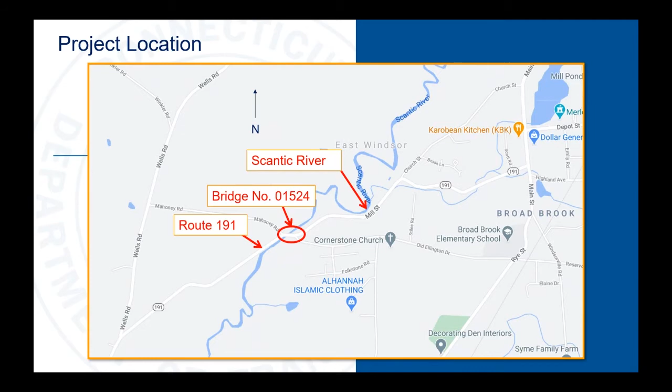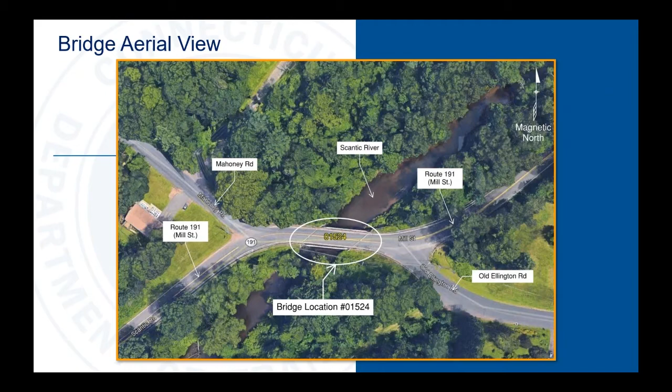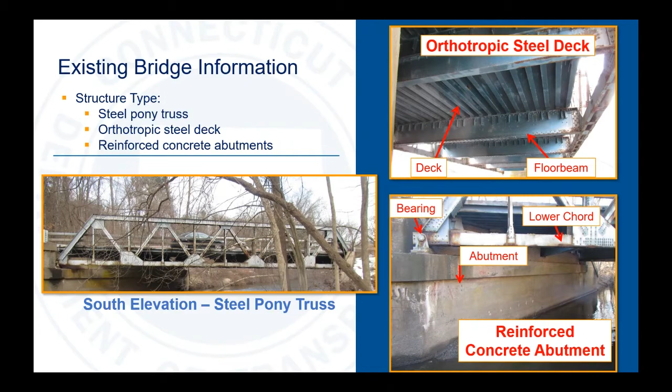The existing structure consists of a steel pony truss floor beam system supporting a steel orthotropic deck. The superstructure is founded on a reinforced concrete abutment. The span length is 76 feet 8 inches, the curb-to-curb width is 27 feet 10 inches, and the bridge overall out-to-out width is 29 feet 0 inches.

Based on the latest traffic data, this bridge services an estimated 1,500 vehicles per day. The existing bridge was originally built in 1925 by the Berlin Construction Company and partially rehabilitated in 1987. The Berlin Construction Company, headquartered in Berlin, Connecticut, constructed many similar bridges throughout the Northeast during the early 20th century. Several of these bridges are listed on the National Register of Historic Places, and this bridge is eligible for listing. It is a steel pony truss, which was typical of the era for a bridge of this span length.

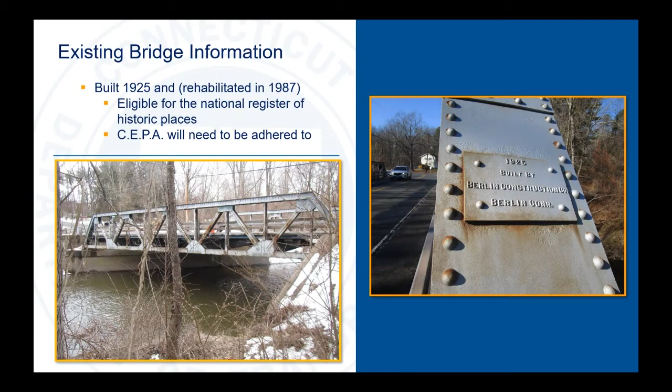I will now hand it over to Kevin Fleming, who will discuss the CEPA process. Thanks, Corey, and thank you all for joining us here tonight. My name is Kevin Fleming, and I'm a transportation planner here at DOT in the Office of Environmental Planning. As previously noted, we're here tonight for a public information / CEPA scoping meeting.

Now, what does that mean exactly? What is CEPA and what is CEPA scoping? The Connecticut Environmental Policy Act, or CEPA for short, provides a process for the various state agencies to follow in order to identify and review any action that may significantly affect the environment. Essentially, the core purpose of CEPA is to provide a public process for state agencies to identify and assess the extent to which a proposed action may affect the environment, and also to evaluate alternatives to avoid or minimize such impacts. Now, a key component of CEPA, and I can't stress this enough, is the public's opportunity to review a proposed project and provide feedback.

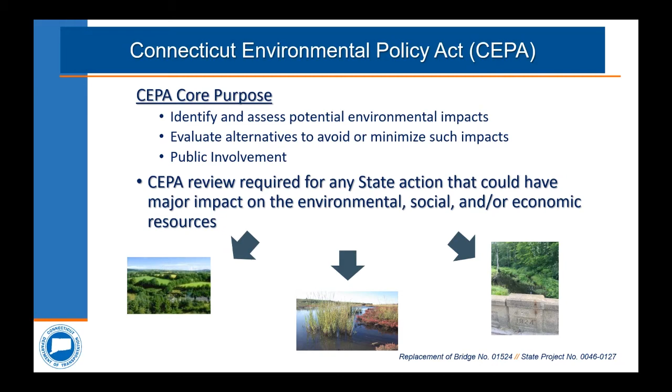So your feedback is not only greatly appreciated, but also a very important part of the CEPA process itself. While conducting our review of a project, CEPA requires us to consider both the direct and indirect impacts a project may have on a really wide range of environmental resources. This slide shows at a high level the types of physical, natural, and socioeconomic resources we have to take a look at. This isn't necessarily an all-encompassing list, but should give you a good idea of the range of resources we consider for each project. Not just for CEPA, but since this project involves federal funding, we must also consider these resources under NEPA, the National Environmental Policy Act. So we must look at everything from air quality and greenhouse gas emissions, potential impacts to cultural resources, floodplains, wetlands, land use and zoning, recreational resources, and really everything in between.

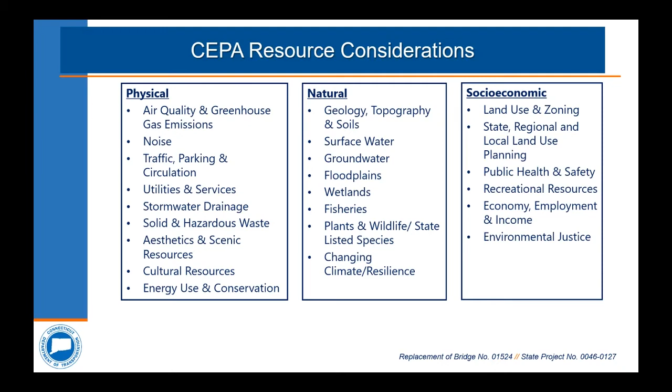So now that you have an idea of what CEPA is and what we have to consider under CEPA as far as the environment goes, what exactly is scoping? Well, scoping under CEPA has a really specific definition, and the process involves some defined, specific steps for public outreach.

Under CEPA, scoping is defined as the gathering and analysis of information that a state agency will use to establish the breadth of environmental review of a proposed project.

That scoping process begins when we publish a notice of the project in the Environmental Monitor, an online publication run by the Connecticut Council on Environmental Quality, or CEQ. That publication kicks off a minimum 30-day public comment period.

For this particular project, we published that notice on April 20th, and that kicked off the CEPA scoping process. Comments will be accepted through the end of the process, which would be Friday, May 21st.

The idea really is to solicit comments from the various regulatory agencies, municipalities, and the public to identify any potential alternatives, and also to identify any specific aspects of the environment that need to be analyzed. Often the local community has unique knowledge of the project area, including any potential community concerns or information on the various resources in a particular area.

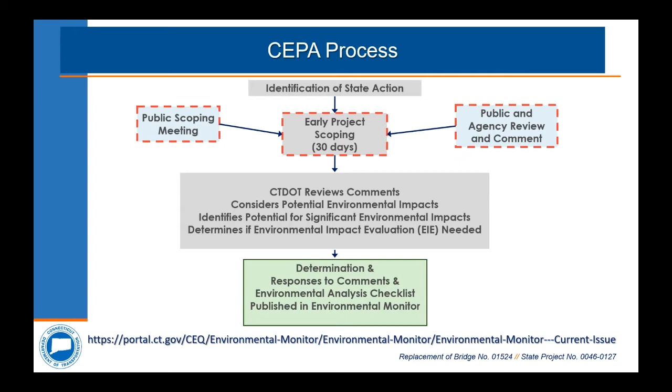Now I'll go ahead and hand the presentation back over to Corey, who will go through the specifics of the project itself.

Thank you, Kevin. On the left is an image of the South Bridge elevation, and on the right is an image of the North Bridge elevation.

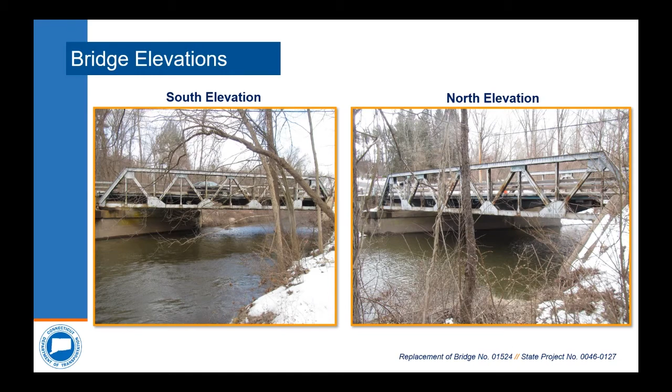This is a 3D rendering of the existing structure, highlighting the main bridge elements. First, we have the bridge deck, which provides the riding surface for traffic. Next, we have the floor beams and truss members, which together form the superstructure of the bridge. This carries the load from the deck and transfers it to the substructures at the end of the bridge, which then carry the load to the ground.

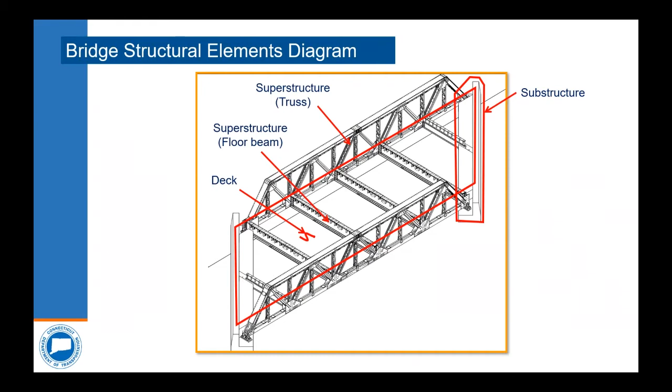The state's bridges are inspected biennially to monitor changes in condition. This bridge was inspected in January 2021, and the following table presents the element ratings for the deck, superstructure, and substructure. These elements are rated on a scale of 1 to 9, with 1 being imminent failure and 9 being excellent. Only when a bridge drops to a poor condition, rating 4, does it become a candidate for a rehabilitation or replacement project.

Although the superstructure is now rated as serious, rating 3, we would like to reiterate that the bridge remains safe for all passenger vehicles and trucks under the 11-ton posted weight limit and poses no safety concern to the public. The repairs to the truss, which will occur over the next few weeks, will strengthen the bridge to permit passage of East Windsor emergency vehicles, but the bridge will remain posted for the 11-ton weight limit.

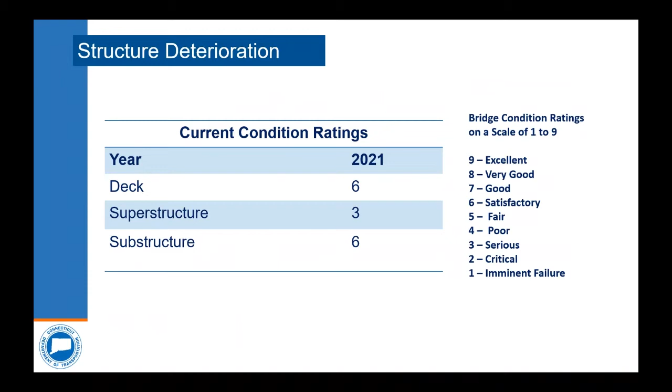This is an outside beam of the deck. Note the 1/8 inch section loss on the lower portion of the beam web, as well as the laminated rust on the bottom flange.

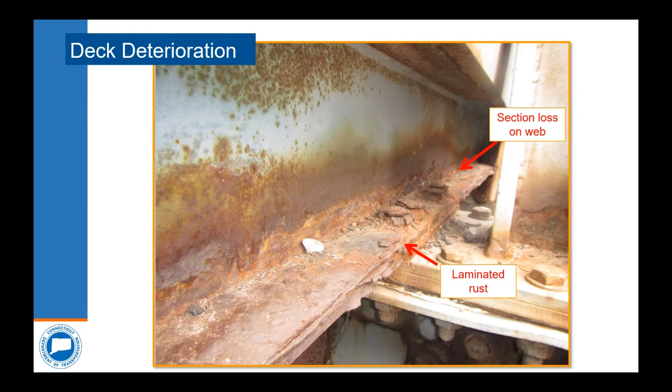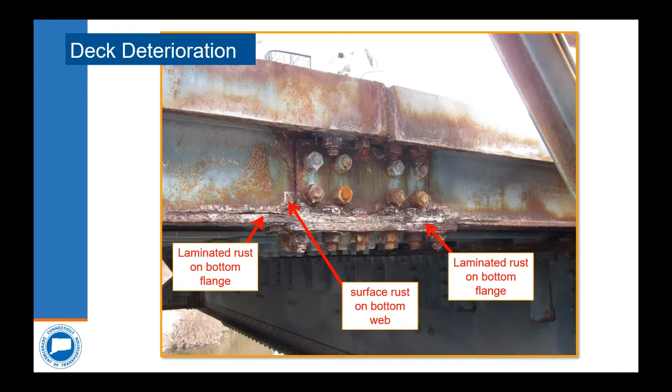Here we see a beam and bolted connection with laminated rust and surface rust. This is a close-up of the bolted connection from the previous slide. Note the bolt heads with rose budding, due to laminated rust forming around the bolt heads.

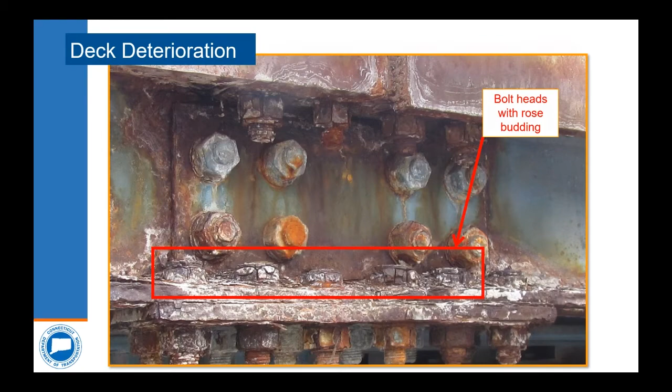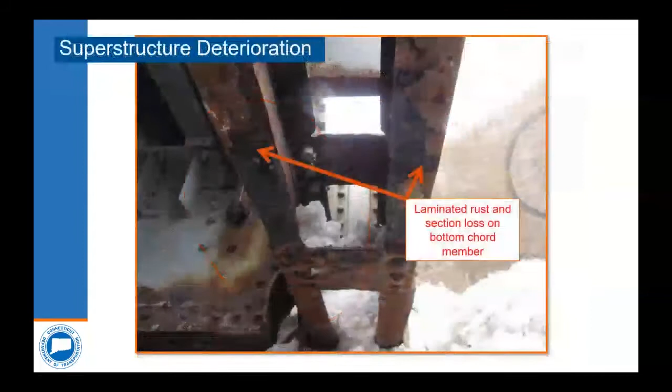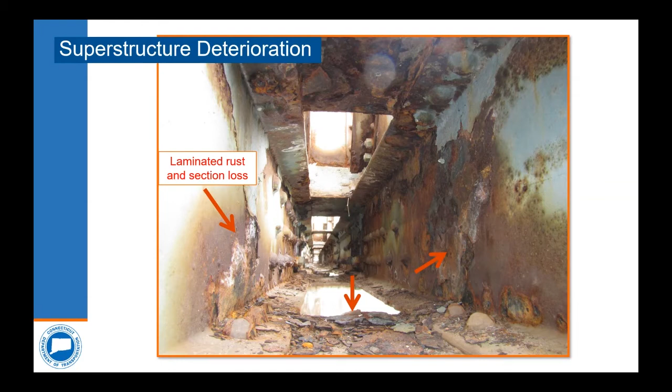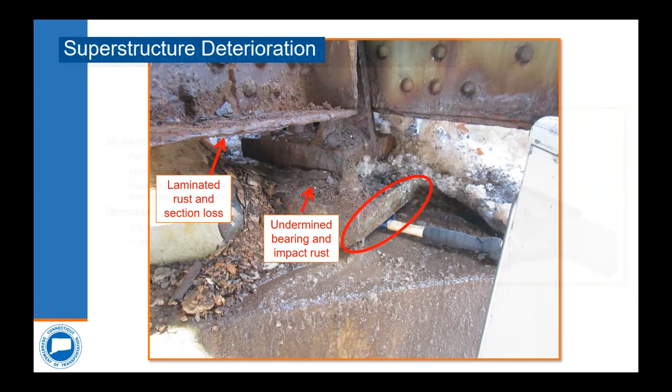The load carrying capacity of the existing foundation, founded on timber piles, cannot be determined with certainty and therefore cannot be reused. As a result, we are proposing an approximate 125-foot long steel multi-girder bridge, founded on a new pile-supported concrete foundation which spans the existing substructure.

The proposed finished roadway will be higher than the existing, to raise the low chord of the bridge and increase underclearance of the Scantic River during storm events. Other structure types may be considered as the design progresses. However, the noted substructure and hydraulic constraints are among the determining factors of the design and the selection of a structure.

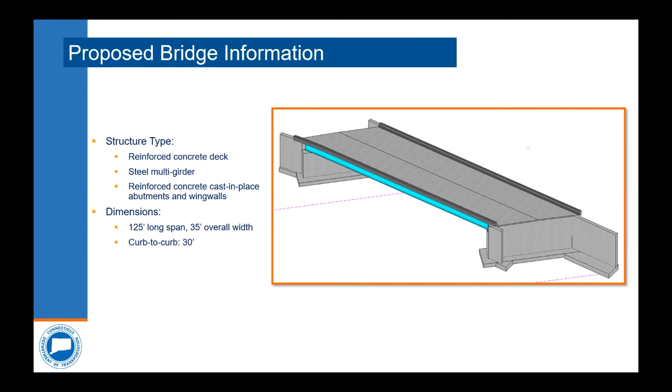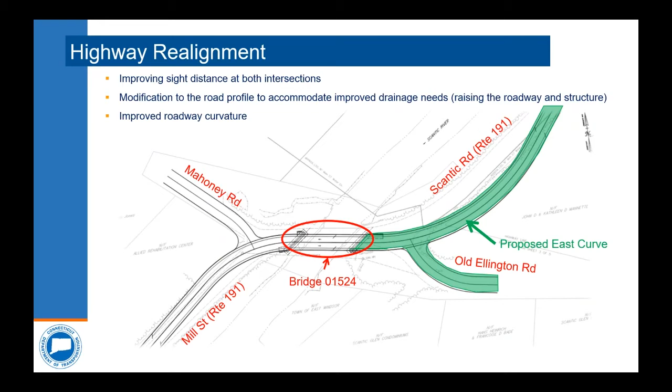Why improve the stopping sight distance, you may be wondering? Let's explore this. Here's the existing condition. The blue lines represent the sight line of the blue car, and the yellow car represents the farthest the driver in the blue car can see. The speed of 24 miles per hour indicates the safe travel speed under normal conditions that allows the driver to see an obstacle, react, and stop before colliding with it. This speed decreases with impairments to the driver and road conditions. The existing curve is below standard for the posted speed limit on this stretch of highway at both curves.

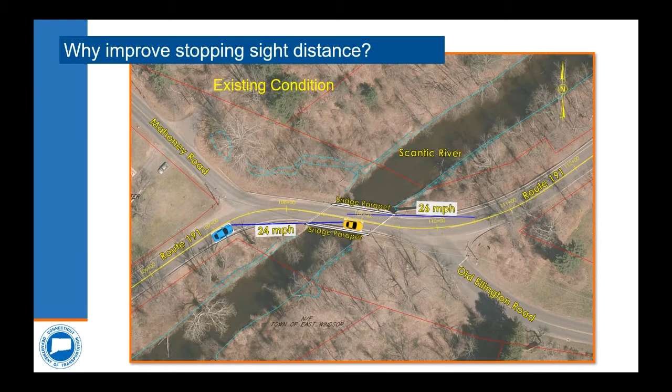What are we proposing? Here is the worst case stopping sight distance along the proposed realignment. The west curve has a longer sight line and an increased safe travel speed, from 24 miles per hour to 25 miles per hour. However, this is still below the posted speed limit. The east curve sight line has been increased and the safe travel speed has been increased to 35 miles per hour, matching the posted speed limit.

These improvements offer greater visibility for drivers and increased safety for both the driver and those they share the road with, whether it be joggers, cyclists, or walkers.

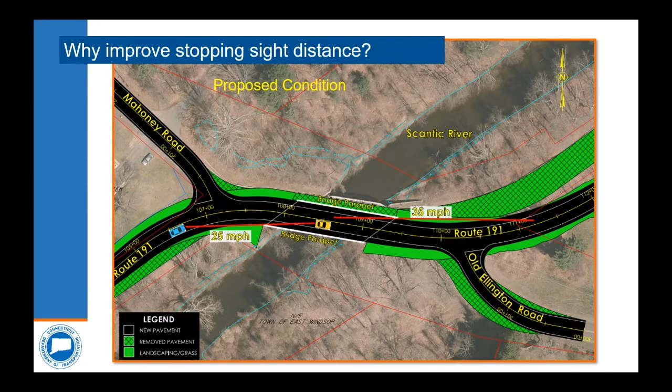So what if we just build the new bridge and don't change the highway? Well, if the bridge location, span length, and skew were all the same as what's there now, this may be an option. However, due to the increased span length, we have more things to consider. It's department policy not to make conditions worse when carrying out a project of this nature. As you can see, doing nothing to the curves decreases both the length of sight lines as well as the safe travel speed.

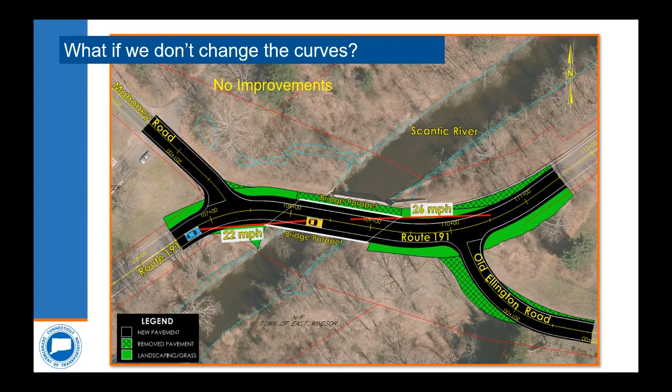The proposed realignment will have the following right-of-way impacts. At 40 Mahoney Road, we are proposing a partial land acquisition for the construction of the new curve of Route 191, and an easement for the slope supporting the roadway.

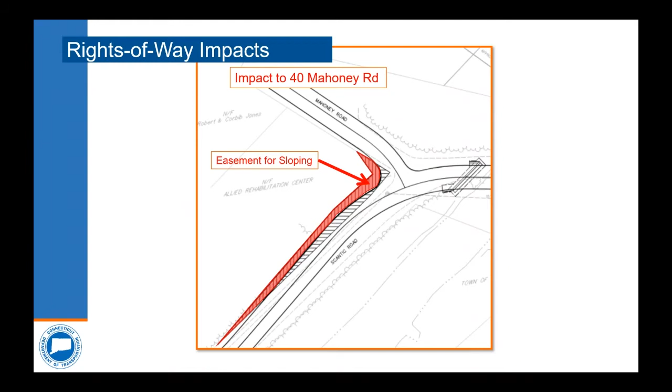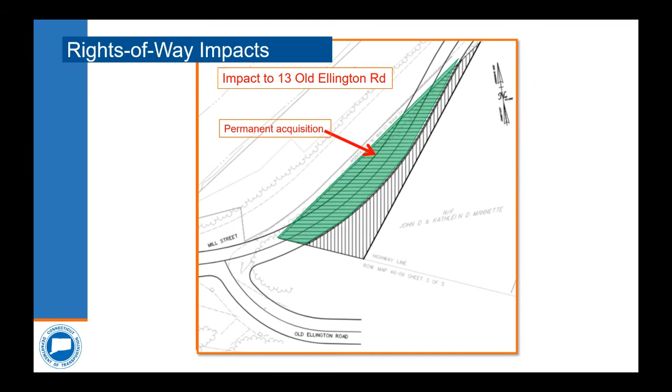At the east curve, our proposed right-of-way impact would include a partial land acquisition at the property adjacent to 13 Old Ellington Road for the construction of the new curve, and an easement for the slope supporting the roadway.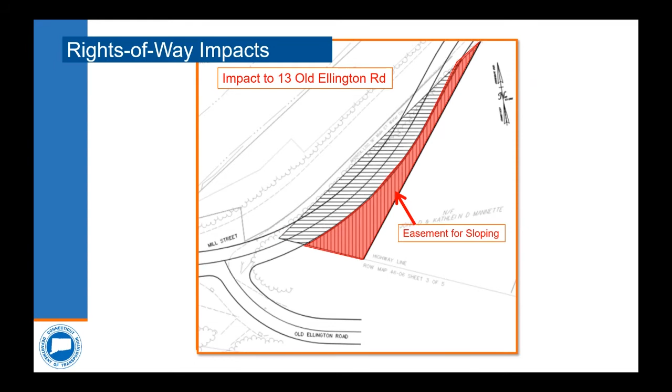My name is Matt Geanacopoulos, and I am a project coordinator with the department's Division of Rights of Way. It is our office's responsibility to acquire the property rights needed for transportation projects.

The proposed project design requires the acquisition of property rights, so I'd like to give a brief overview of the department's right-of-way acquisition process. Please keep in mind that the specific impacts are still being fine-tuned and may change as the design progresses. Any property rights required will be acquired in accordance with Connecticut General Statutes, Sections 13A-73 and 13A-98E. Whenever there is federal money used in any aspect of a project, the department must adhere to the Uniform Relocation Assistance and Real Property Acquisition Policies Act of 1970 as amended.

Once the design has moved to the point where we are ready to begin the acquisition process, each affected property owner will receive a formal letter of intent to acquire from our office, along with a property map which depicts the exact property rights to be acquired.

At that point, our office will determine the fair market value of those property rights and use that value to establish an offer of just compensation. That offer will be sent out to the property owner in writing, and a right-of-way agent will be available to meet with the property owner and explain the project, go over the specific impacts to their property, and explain the state's offer.

The property owner will have a reasonable time, typically at least 30 days, to consider the state's offer and enter into negotiations. If an agreement is reached, the state will prepare all the necessary paperwork and record the deed and the property map on the town land records.

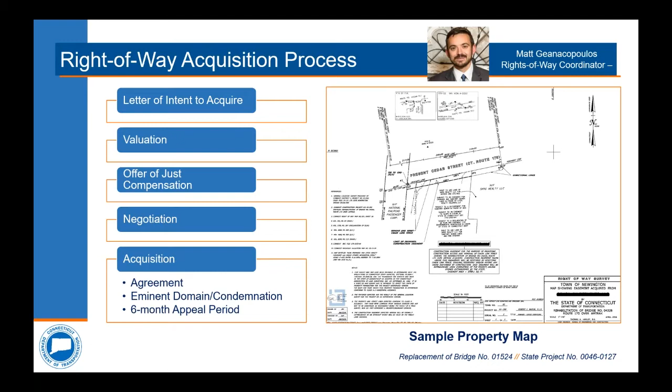If there are any questions regarding the department's right-of-way acquisition process, I'd be happy to address them once the presentation has concluded.

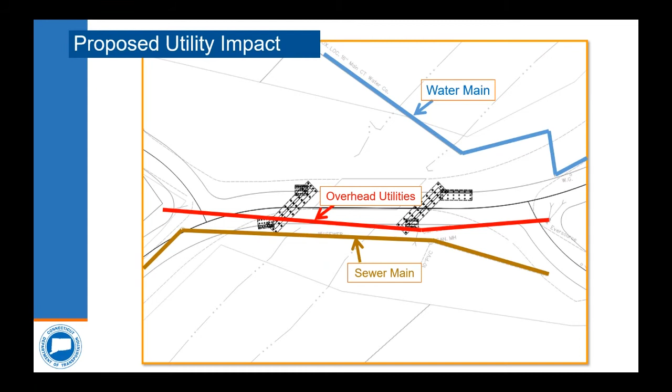Thank you, Matt. We have 3 utilities on site. At this point, we anticipate only impacting 2 of them. We do not anticipate impacting the 16-inch underground water main to the north. We will need to permanently relocate the south side overhead utilities.

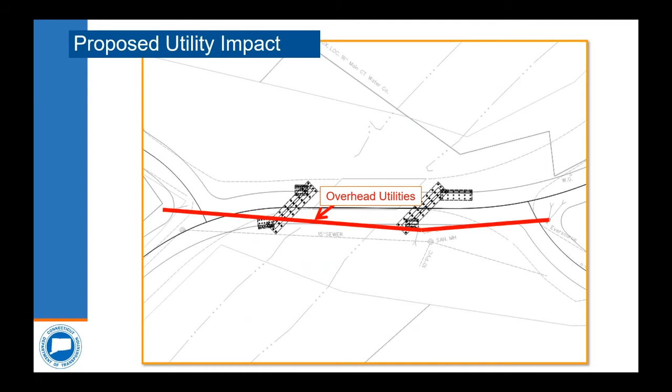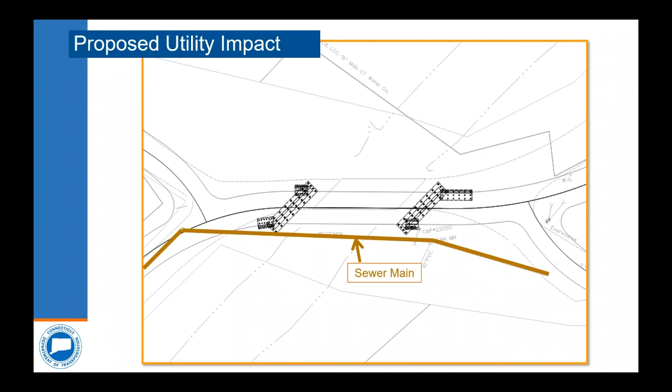The south side 15-inch underground sewer main will be temporarily relocated for the duration of the project and permanently replaced upon completion. Temporary utility relocations are anticipated to be completed in the fall before construction begins.

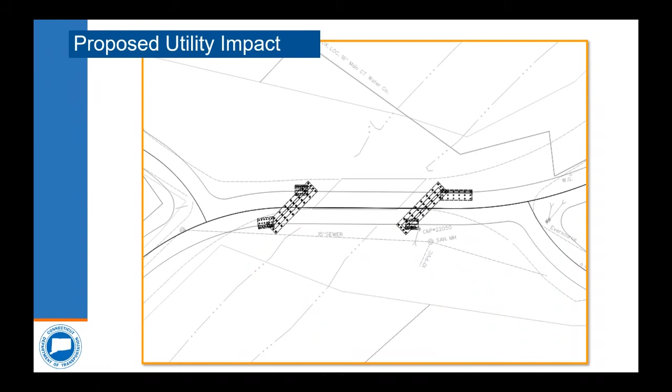The proposed detour is approximately 11 miles and utilizes Route 140, Route 5, and Route 191 to the north and south of the bridge. The proposed detour duration is anticipated to be approximately 9 months, running from March through November of 2023. The demolition of the existing structure and construction of the proposed structure will occur during this time.

It's the department's policy to establish signed detours along state routes whenever possible, and to avoid detours which direct vehicles to local routes. There are shorter routes around the bridge in which local roads could be used by residents, but the department will not post signs for these routes.

A full bridge closure and detour is required because the existing bridge is a truss structure. Due to the structure type, it's not possible to remove half of the bridge and maintain continuous live traffic on the other half while the new bridge is constructed in stages.

The department understands the impact that a lengthy detour, both in miles and time, will have on town residents. As the design continues to develop, we will thoroughly investigate accelerated bridge construction methods, which may shorten the time the detour will need to be in place.

Coordination with the appropriate regulatory agencies is ongoing. At this stage, we anticipate the following permits: individual flood management certification, pre-construction notification, Connecticut Addendum USACE general permit, and the general water resource construction activities.

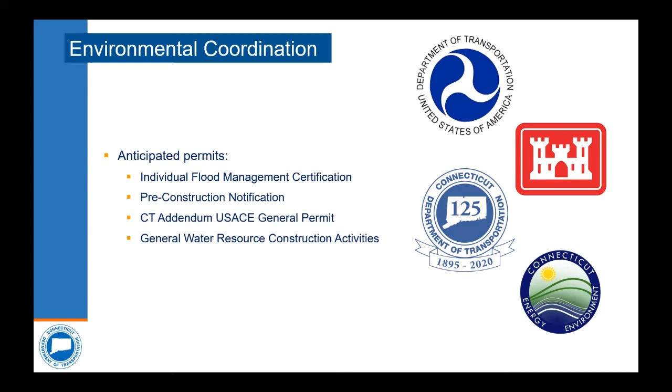The project will begin with utility relocation in fall of 2022. Then beginning in spring 2023, Route 191 over the bridge will be closed and a detour implemented for approximately 9 months, spanning from March 2023 to November of 2023. Demolition of the existing structure and construction of the proposed structure is expected to last for a single construction season.

Based on the current level of design, the project is estimated to cost $9 million. The project will be funded using 80% federal and 20% state funds. There will be no local funds required for this project.

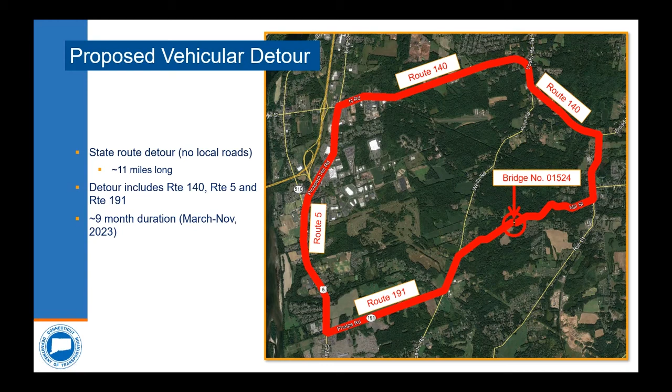Joe has followed up again, pointing out you could install the bridge to a new location that accommodates the four-legged intersection. There are site constraints and other issues regarding the location of the existing substructure and how we have to locate the existing bridge relative to the existing substructure, which are the reasons why it's oriented the way it is. That would make it very challenging, I'll say. Never say impossible, but extremely challenging to orient the bridge in such a way that it would be opposite both legs.

Again, I'm gonna say it though: we will take your comment into consideration as we do all comments, and we will look at it.

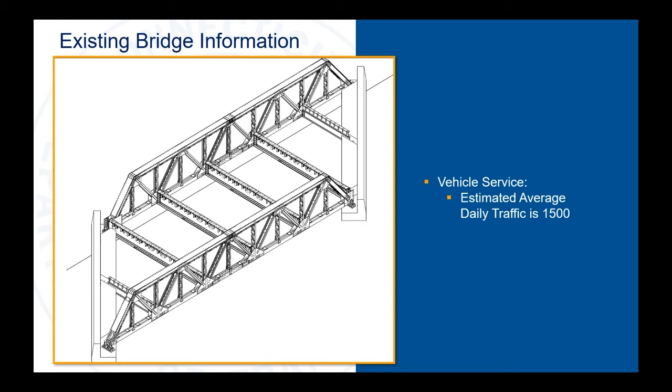Kentaro, a question came in by voicemail. Someone has asked, how much money will this cost the town?

The project won't cost the town any money. It is funded with 80% federal and 20% state funds.